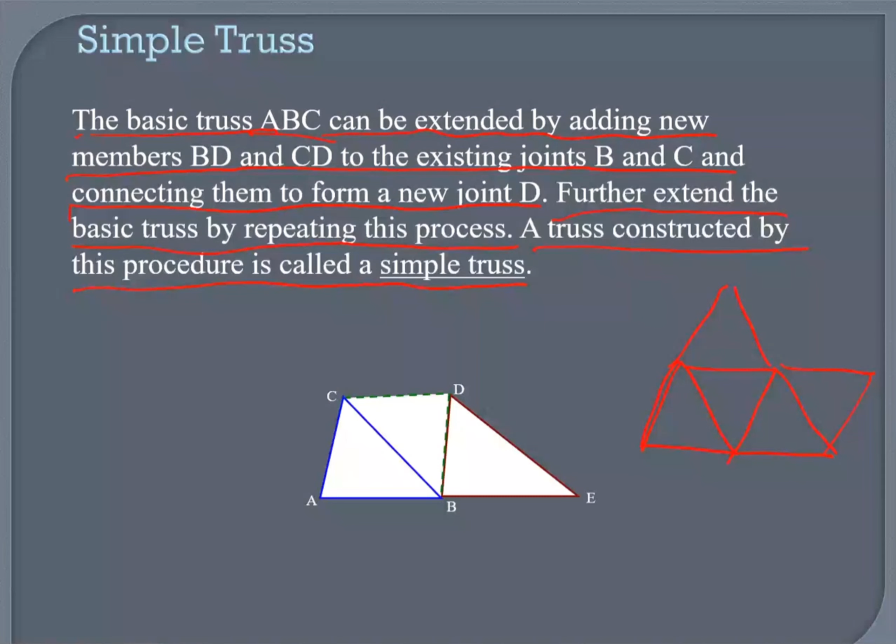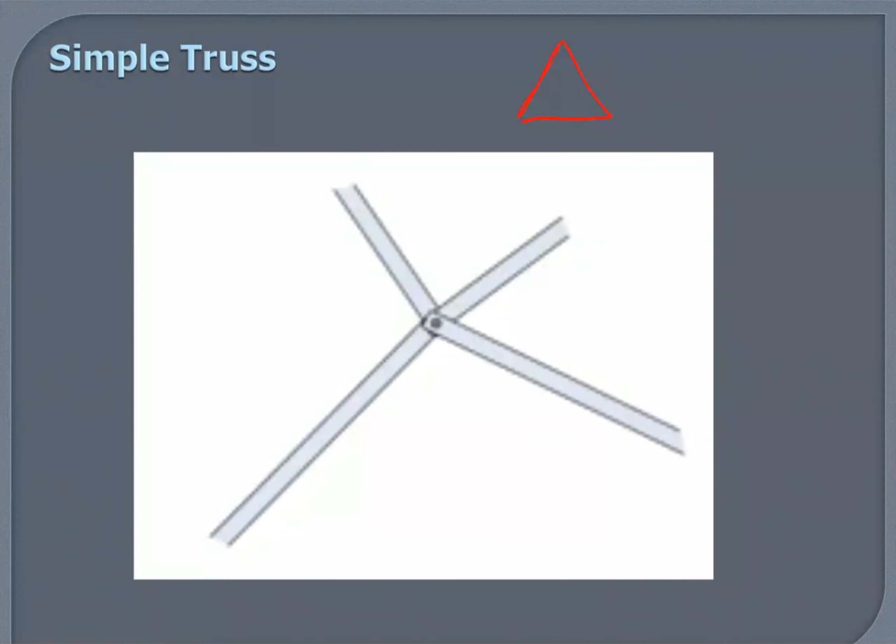Interesting. Okay, so remember, you've got a truss. There's a truss. Let me change the color.

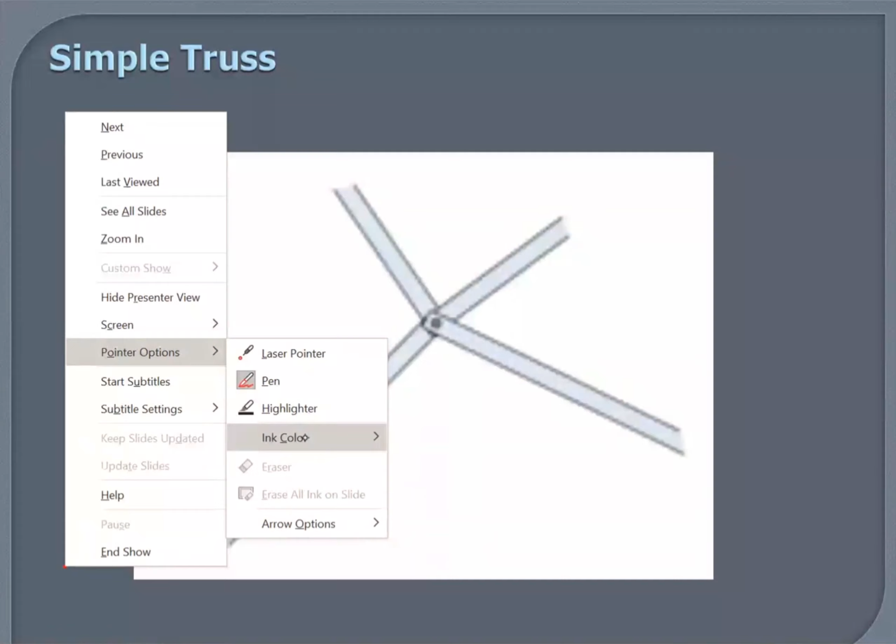So remember, you've got a truss. You have another truss. You have another truss. And here I'm focusing on this point. You've got a pin, that's what is shown here. So basically, it's showing that the members are connected. Pin, okay.

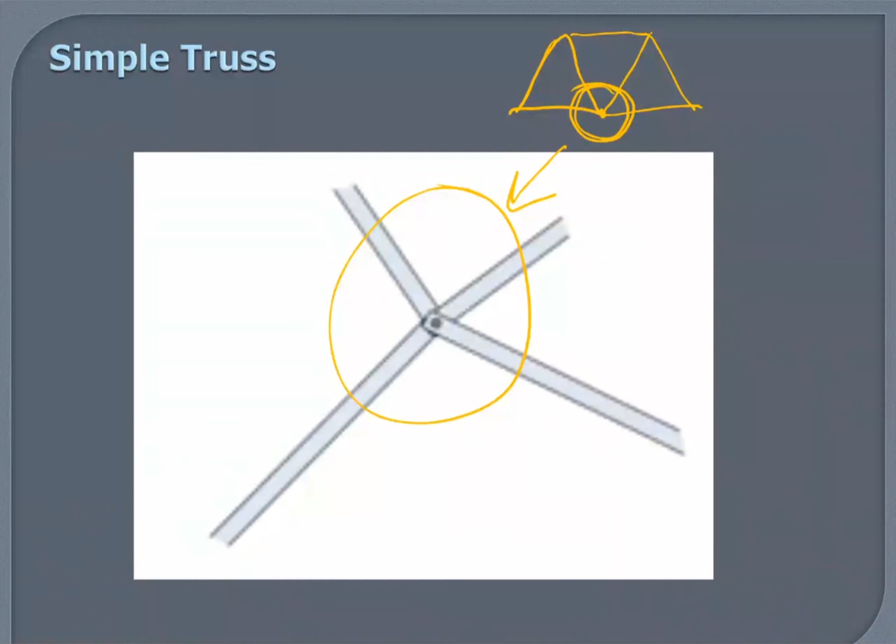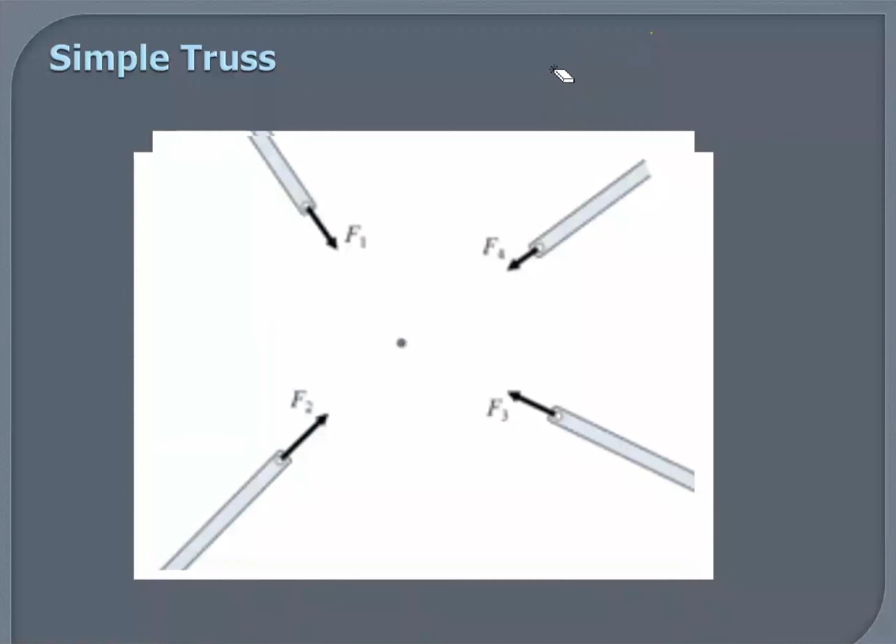Now I can open it up. And I want to show you this. Remember, I had a point. Sorry, where's my truss? Why did I remove it?

So I'm looking at this point. I've got one point and I've got four members. I can open it up. So that's the point, and I've got four members here, just like shown in this graph.

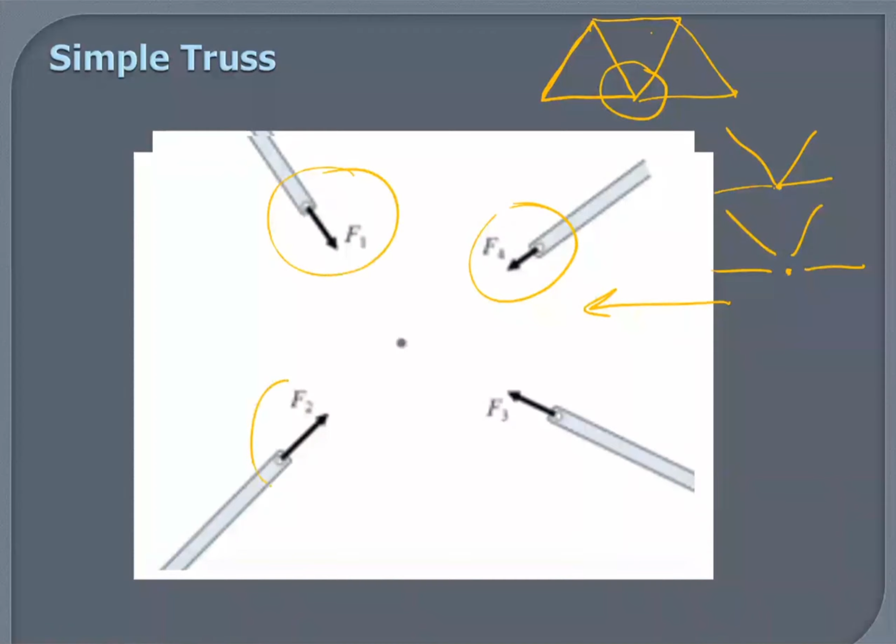So the force being applied is assumed inward. Each member is putting force inward. So if the force applied is inward, if I draw the free body diagram of this pin, what will be the direction of the force for the pin?

Let me just draw lines. It is same as, remember I mentioned, if I have a table, that's a very weird table, just a second, as a table on a floor, and I put a box on it, box.

And I ask you to draw the free body diagram of the box. So what would you do? You will make a box, only the box. You will put a weight acting downward, and you will write a normal force upward. Am I right? Is this a free body diagram of the box?

Am I right? Sir, I guess you take a point instead of the box. Yes, I've taken the point. That's the point here, but I made the box. Okay sir. So now this is the free body diagram.

So this one is the free body diagram of the box. And look, I've got the reaction force acting upward.

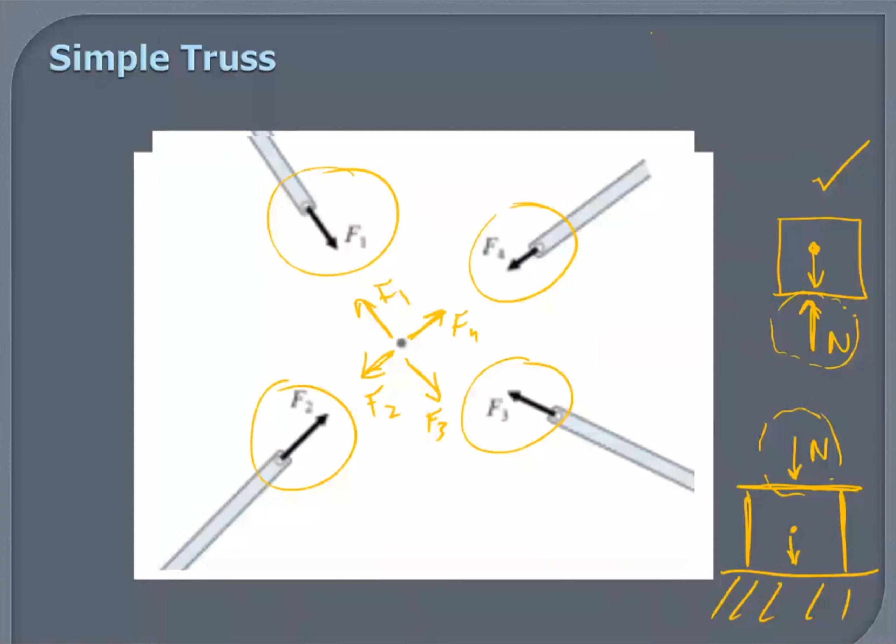So, I've got the picture here. If you look at the pin, the forces are outward. If you look at the member, the forces are inward. So it's exactly what I mentioned whenever we draw a free body diagram. Is that clear to everyone, or do you want me to clarify this again?

Sir, could you clarify it one more time? Okay, okay.

I'll come back to the same box part. That's why it will be easy to explain. And it's on a table.

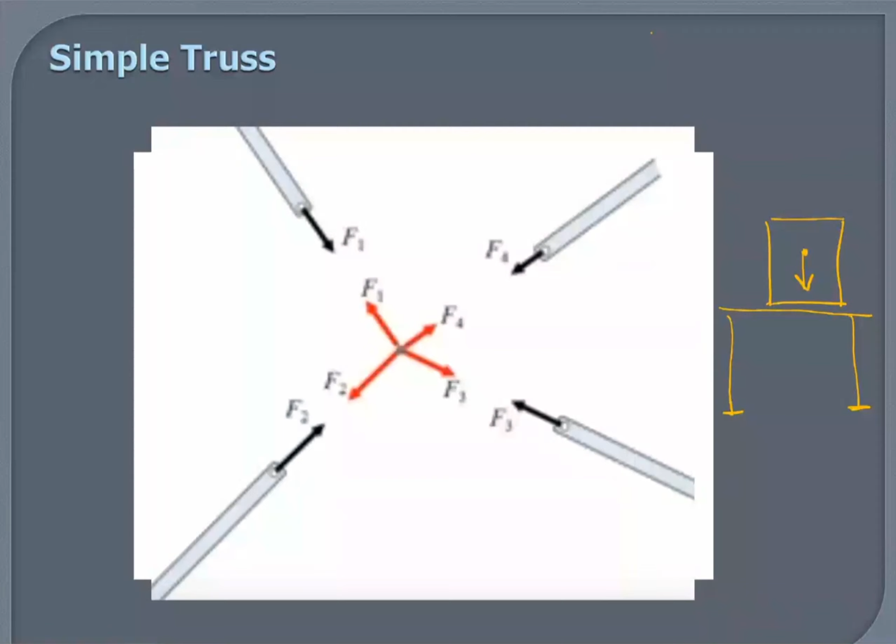So I ask you to draw the free body diagram of the box. I will make a box, free body diagram, and cut it off from the surrounding. Remember, whenever you draw a free body diagram of anything, you draw that body part and cut it off from the surrounding. So let's look at the active force. Active force is this one, acting downward. Am I right?

Yes, sir. And then you got the reactive force, which is here. Is that clear? Yes, sir. The sum of all the forces along the y-axis is equal to 0, because the weight acting downward is equal to R upward. It has to be 0 because it's stationary and it's in equilibrium. Is that right? Yes, sir.

Okay, now if I ask you to draw the free body diagram of the table, so let's have a table. And its weight, G, would be somewhere here. That would be the weight of the table. Sorry, that's MG, okay?

So I'm drawing the free body diagram of the table only. If I have to draw the free body diagram of the table, I will draw the table and cut it off from the surrounding. I will not put a box on it. Am I right? Yes, sir, because I'm drawing the free body diagram of the table.

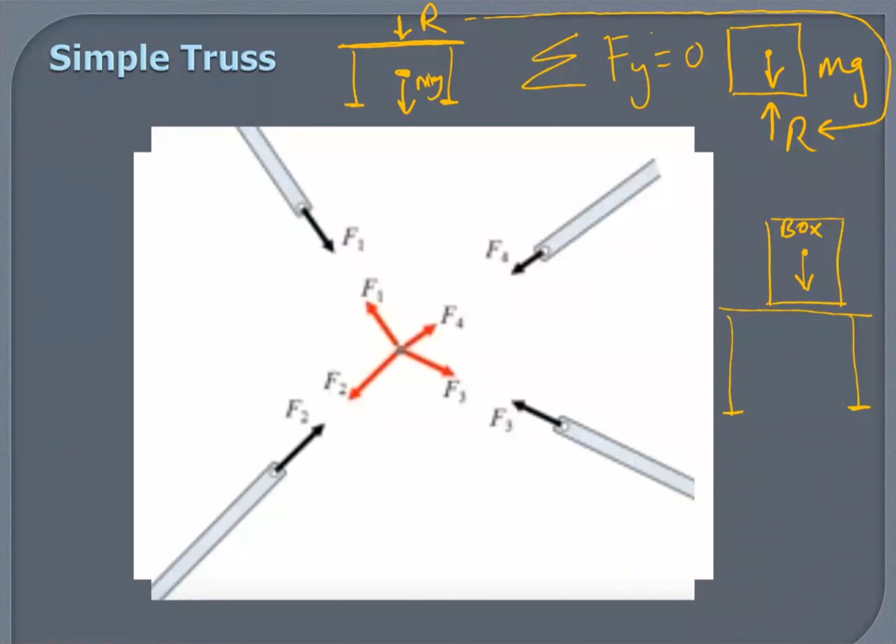I'll explain more in the coming slides. Okay, it's fine, sir.

So, tension: remember, tension is pull away from the joint, and compression is push towards the joint. You have to remember this. It is common sense. Force is being applied inward, it is trying to reduce the size of the point, so it's under compression. Force is acting outward, it is trying to elongate the point, so it is under tension. Okay, so that's common sense, won't go into detail.

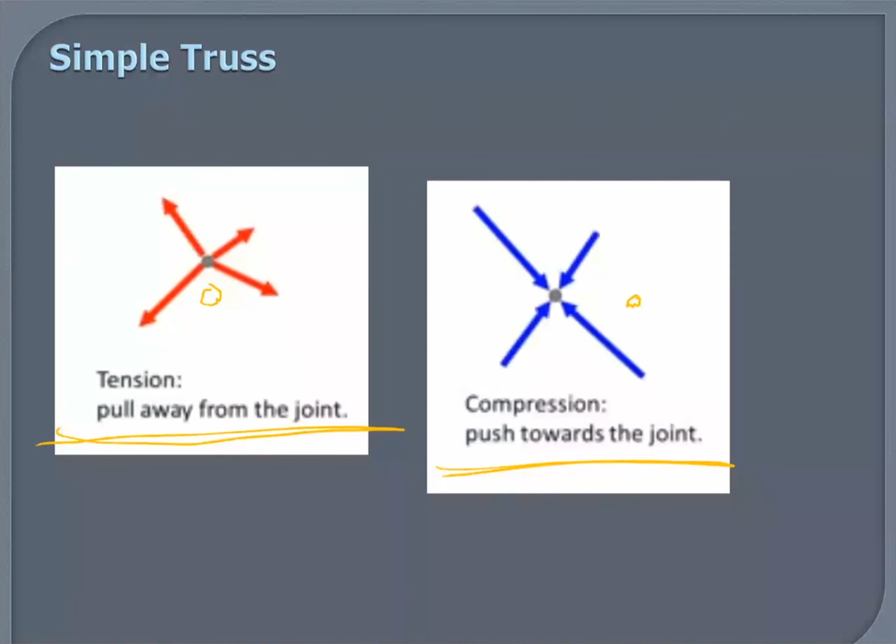And remember, you did particle equilibrium. So there was like...

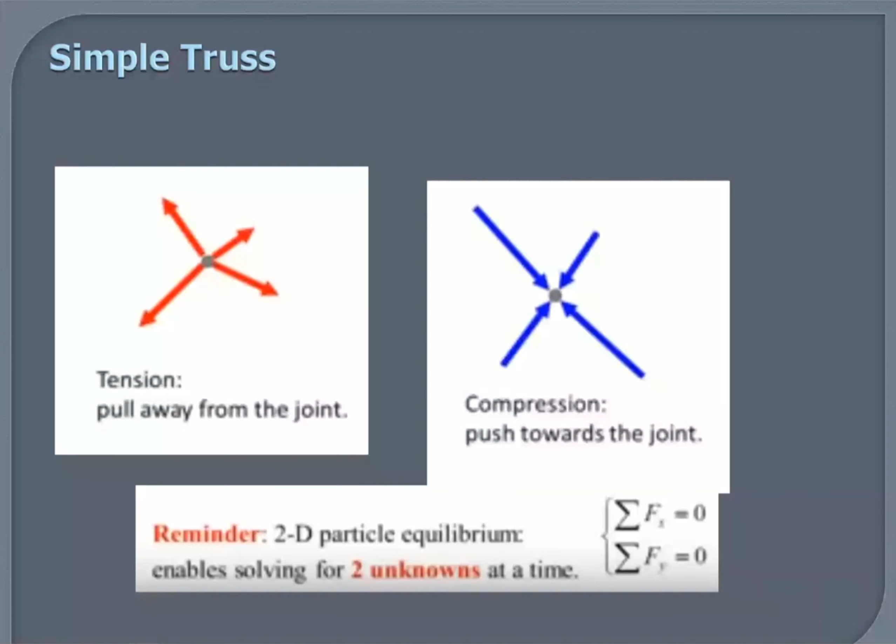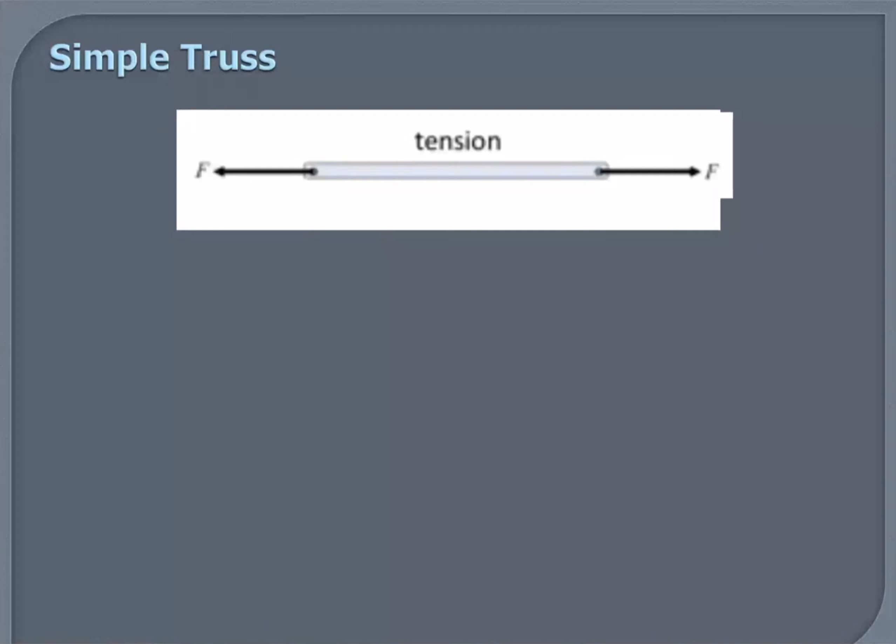Okay, so remember in tension, yes, it's being pulled. So if I've got this member here, stay with me, okay, so that I make this perfectly clear to all of you. If I have this member and I cut it off from here, okay, and I draw the free body diagram of this part, so would it look like something like this?

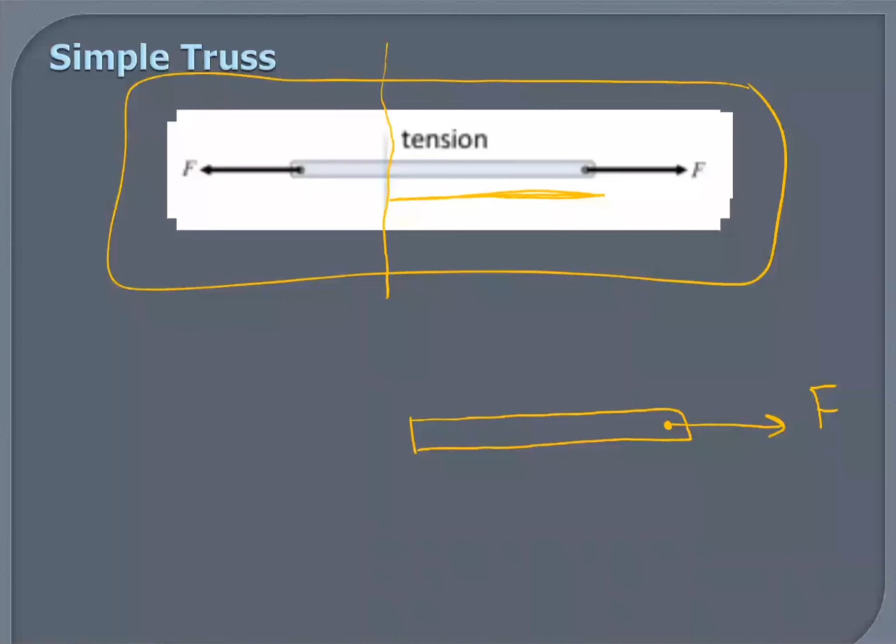I've got one student pulling it at 10 Newton in this direction, student 1, and I've got another student, S2, pulling it in the other direction, also 10 Newton. Okay, so it's under tension. This is a bar. Okay, so I've got a bar, and I've got one student pulling it at 10 Newton force in one direction, and the other student with 10 Newton on the other. The total tension force applied on this bar is 10 Newton. Is that clear?

Now I want to break it up from here, so let me make this part only. I'm drawing a free body diagram of this broken part. I've got this force, this is S, and this right here is a 10 Newton force. This is the same bar, and it's in equilibrium.

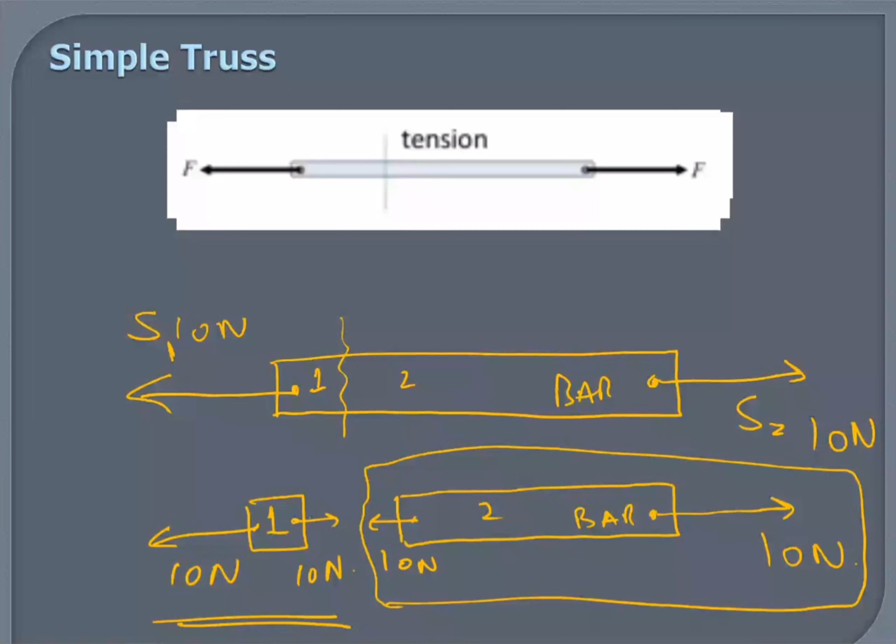Yes, sir, this is part two. And if I look at part one, let me draw it a bit further so it's easy. That's my part one, force being applied. Now for part one, if I draw the free body diagram, is that complete now? Yes, sir. Can you see the force applied here is the same force applied here, but in the opposite direction? Is that now clear to everyone? Yes, sir.

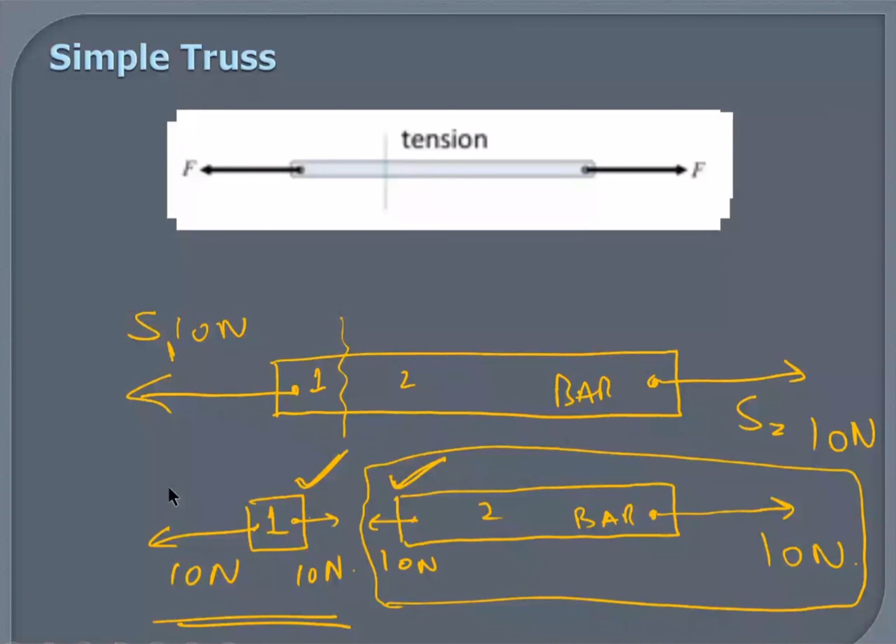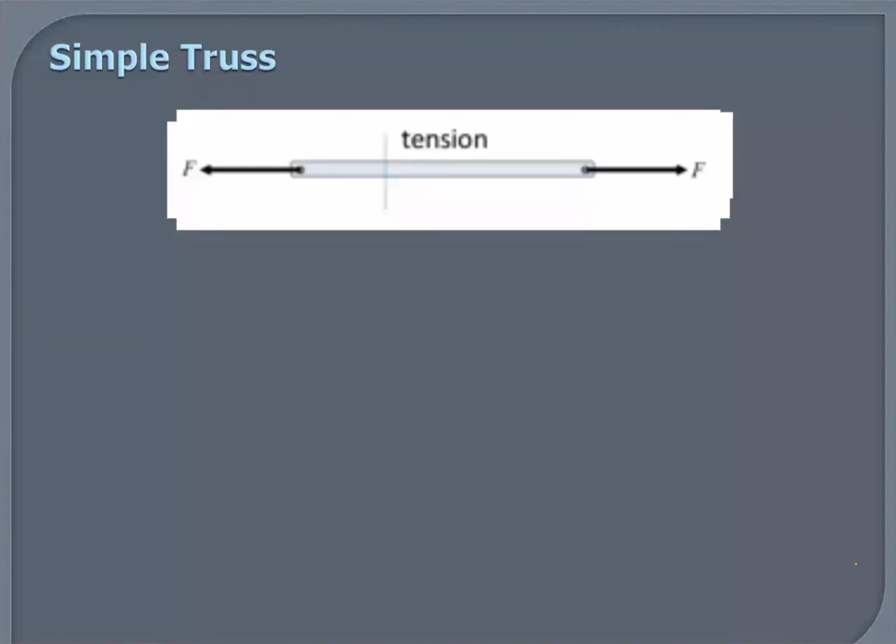Okay, so let's go back to the slides to make it more understandable. Just give me a second. It is basically, you have to imagine what the bar feels when it's being under tension.

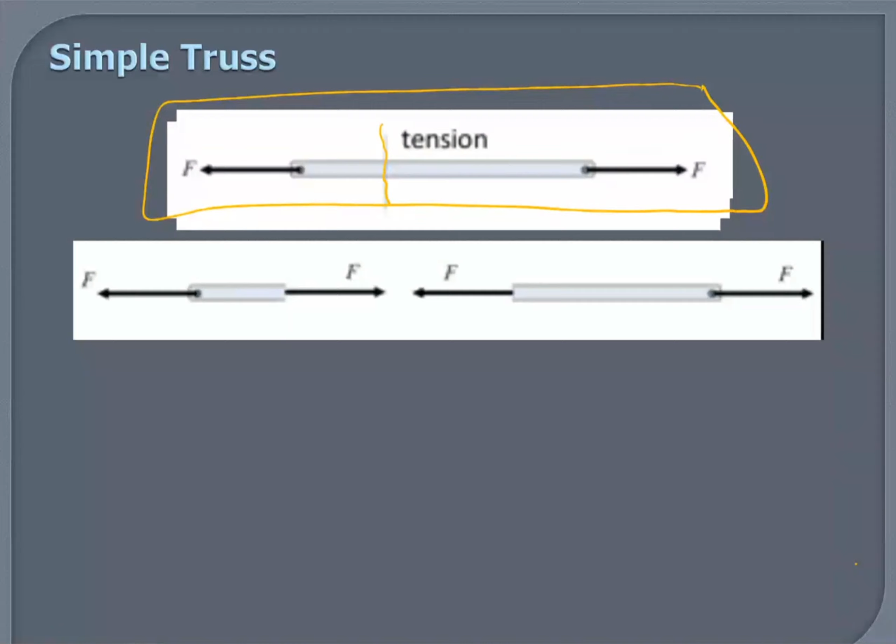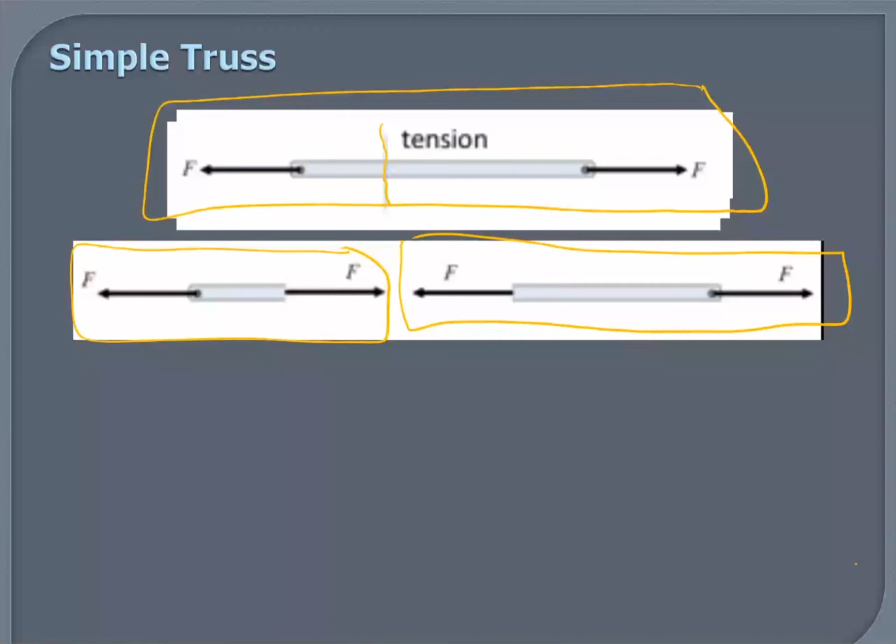So is that right, that I've got a bar under tension? I chopped it off from this part, so that's the free body diagram of one part, and this is the free body diagram of the other part. Both are in equilibrium, is that clear? Yes, sir. So I've got it under compression, I cut it off from the center.

Maybe it's easier for you to visualize this one then. Compression means it is trying to reduce the length of the bar. At every point, it is trying to reduce the length of the bar. Am I right?

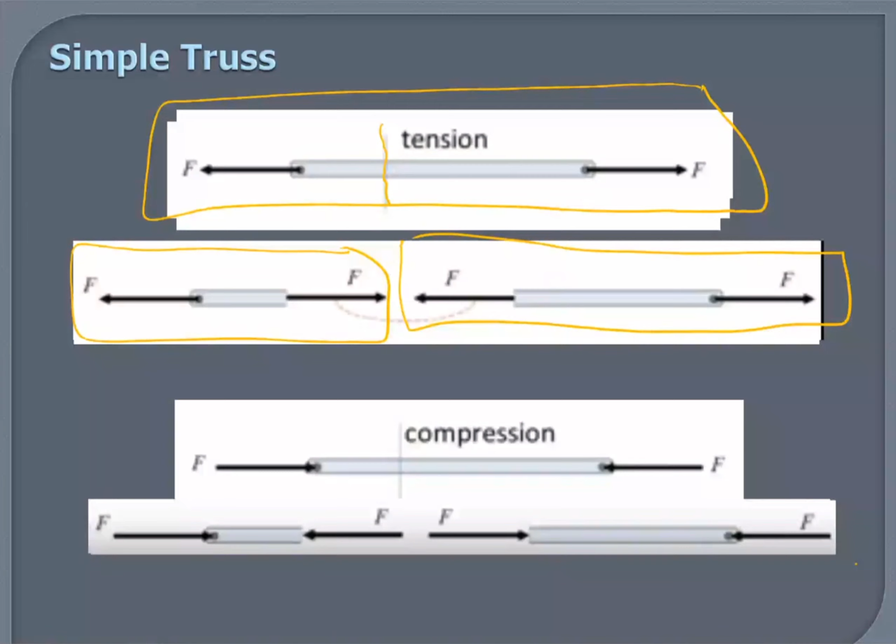Yes, sir. So if I cut it from this part here, I made one part here and the other one here. And if I examine this part, because of the compression, all sections of it want to reduce their size because it's under compression. So the same effect will come here, and it will only happen if you've got a force here. Therefore, it's exactly the same as in tension, same under compression - opposite forces acting at the section. Is that clear? Yes, sir.